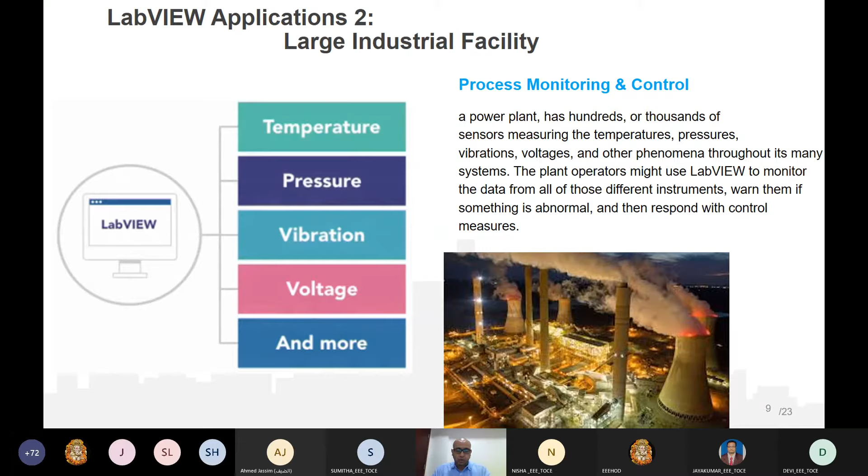Same thing can be done for the industry. Voltage, current, whatever, just name it. In CompactRIO, whatever you have, you will find the right card to connect it directly to the CompactRIO and start working with it.

Now, the third part is for students and research in university. This is the part I like, the part I spent the past 10 years working with, where I find it's very easy for a student to go with it, and more professional. Arduino or Raspberry Pi are fantastic, but they work for some kinds of projects. They have so many limitations.

For example, you have analog input in CompactRIO. In Arduino, you have analog input, but you cannot make analysis on it. It is 0 to 5 volts. If the voltage reaches a point, then you can do whatever you want. If you want to write a program to make analysis, you will consume the Arduino's resources, and it is very limited in sampling time and so many things.

But when you want to control robotics, where every microsecond counts, then of course you have to go with more professional and more accurate software and hardware. And here comes National Instruments equipment.

For example, in some of the drive system projects I did, a millisecond is huge. I have to go to less than 1 millisecond in a drive system, where you have a very delicate process. Then of course I can go with National Instruments, and you will get microseconds, even less.

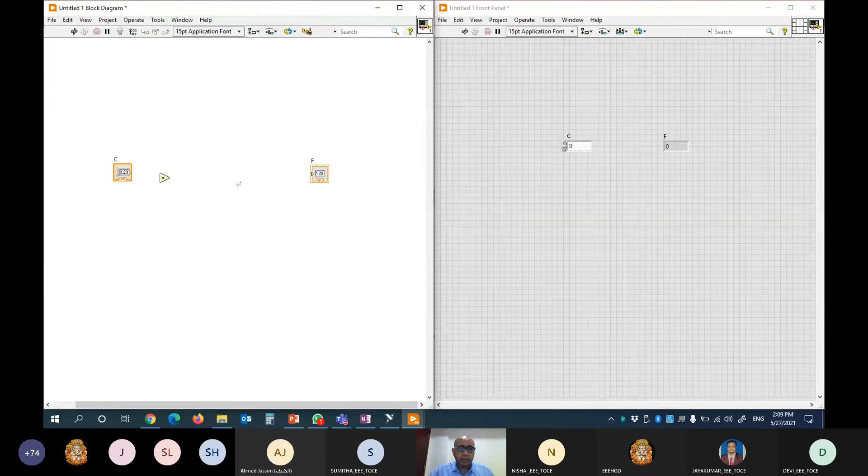Okay, so multiplication and addition. First of all, I'll go to the math. As you can see, it is very easy. Multiplication, and then I go to numeric. There will be addition here, and here I have to create a constant, and here I will create a constant.

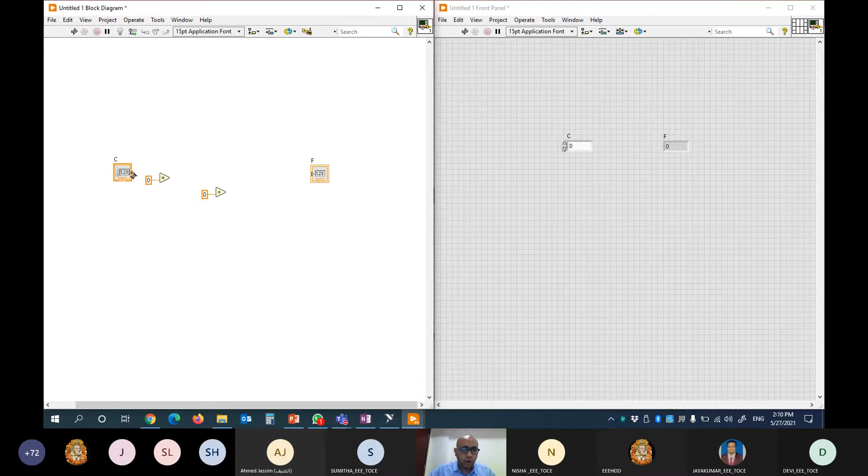Now the Celsius, for example, which I put here, could be a data acquisition, like I can get this signal from a data acquisition. It's going to be a voltage, then I will manipulate the voltage, then it represents the Celsius. So whatever the source of the Celsius you got, it will be connected here, and this one will be connected here, and this one will be connected here. As simple as this. This is what I've done in order to convert the Celsius into Fahrenheit.

I need to change these data. Let me go here, 1.8 and 32. So this one will be 1.8, and here will be 32. It's as simple as this. If I run it, 0 Celsius is 32, right? So if I change the Celsius into, for example, 100, what is 100 Celsius in Fahrenheit? It will be 212. And so on. So basically, this is how easy it is to program in LabVIEW.

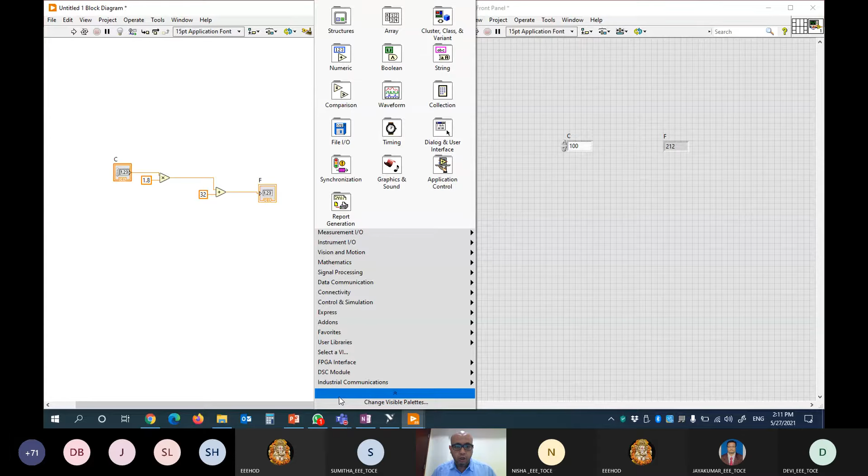If I want to go through LabVIEW very quickly, you can see here the version I have is an academic license, so I have most of the toolkits I can find in LabVIEW. For example, in our college we usually go with the Express, or measurement input output, or instrument input output. Sometimes we go with the Express for the input, and the input is going to be data acquisition. I can put the data acquisition here, and you will see how easy it is.

Now it is open. I want to acquire data, and I can go with analog input, counter, digital, TEDS. I will go with the analog input. Is it voltage, temperature? I have all the types. I will go with the voltage, because let's assume it is connected to a data acquisition and it's going to measure only the voltage. So we have a thermocouple or whatever, then I have a signal, and I want to connect the signal to the data acquisition.

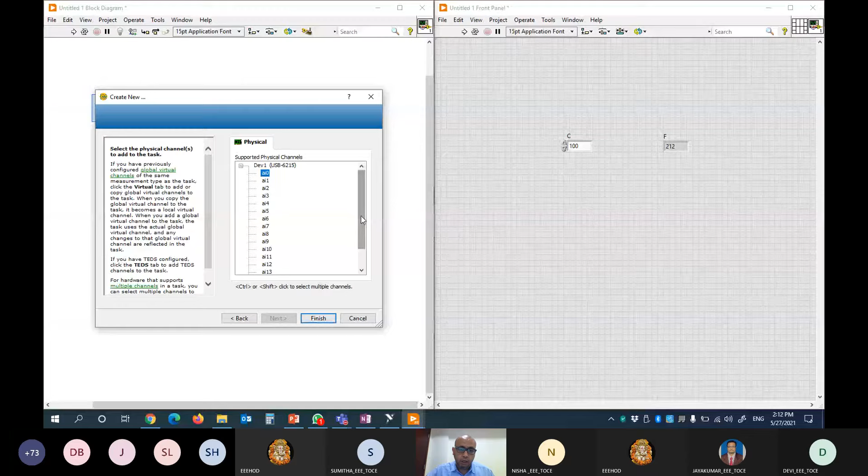I will start with analog input 0. As you can see, the data acquisition I have is the USB 6215, and it can work with 16 analog inputs. So I can say finish. Here I can make a test on my data acquisition. Here I can choose the terminal configuration: is it differential, referenced single-ended, or non-referenced single-ended? You can choose whatever you want.

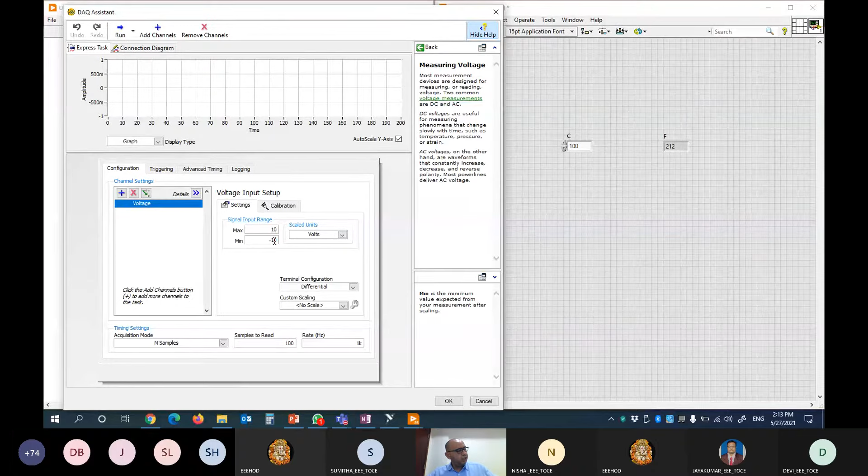I can choose the rate of acquiring data. Here we are talking about 1 kilohertz, a sample rate of 1 kilo samples. This isolated data acquisition can work from 10 to -10. No, wait, this one, the USB 6215, I think can go up to 60 volts, if I'm not mistaken. Anyway, I can decide the maximum and minimum voltage, for example 0 volts. If I press OK, the data acquisition is configured and ready.

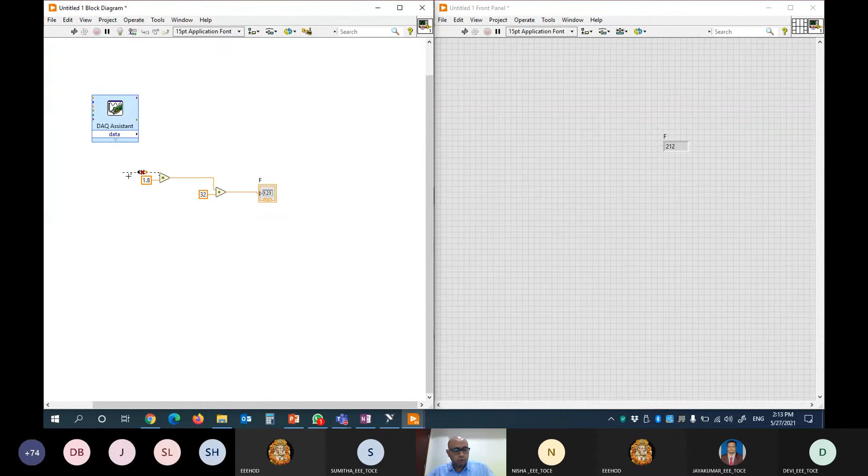All you need to do is connect your transmitter, which generates a voltage, to analog input 0. I can delete this one, Control B, and the data will go here. So the real acquired data, for example in Celsius, I can now change into Fahrenheit and get my value here. I can do a lot of things, for example comparison, if the signal is greater than, let me Control Z, just a minute. Now let's assume I will go here because it will be easier.

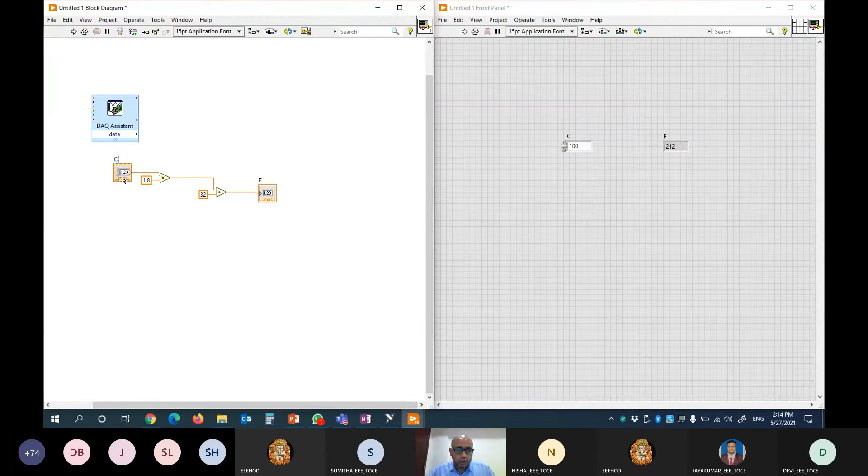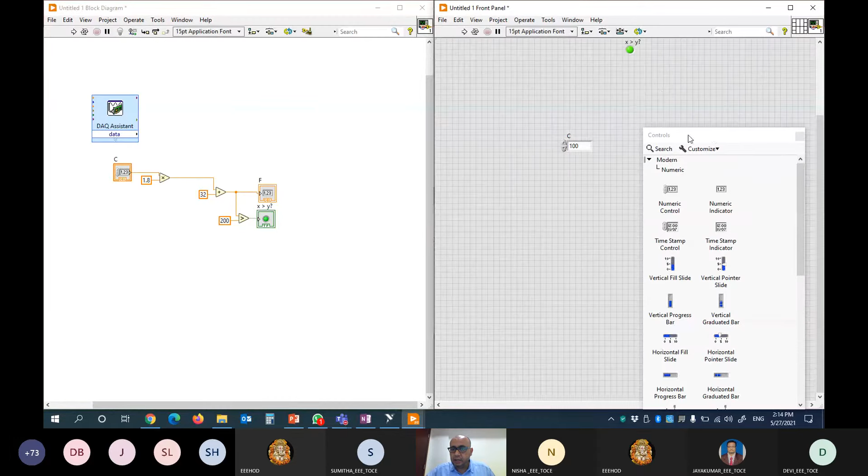I did not connect my data acquisition to any signal, but let's say if I have a comparator checking if the signal, which is in Fahrenheit, is greater than a constant of 200, then I get an alarm. Create an indicator. If I run it, as you can see, the Fahrenheit is 212, so I got a digital signal.

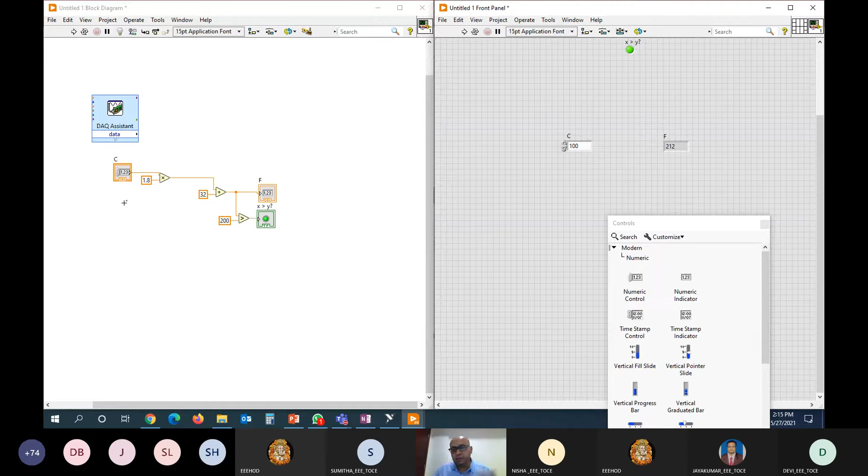This digital signal I can put into another data acquisition, for example, to start an alarm or a cooling system or whatever. So it will be easier for you to use Labview because you focus on the project rather than focusing on acquiring data and generating signals and making sure things are connected. This part is already done by Labview.

I think I took a lot of time. Ralph, are you here? Yes, Mr. Shadi, should you take over now? Whenever you wish. Okay, because I want to give Ralph the time.

I'm actually amazed and speechless with your nice presentation. Thank you, Ralph, thank you very much. I just want to finish these two slides and then I will give you the mic.

Excellent, perfect. So the data acquisition, for example, how it works: it has three steps. First step is the sensor, which is connected to the process. Then the second part is the data acquisition, then the computer, where you have Labview and you want to make your analysis.

So as we said, we have the sensor, then the data acquisition, and then the computer. This is the original one. Data acquisition could be a national instrument data acquisition. By the way, even if you have different data acquisitions from different vendors and you have Labview, it can work with these data acquisitions, it has no problem.

I connected with, if I'm not mistaken, one from Taiwan and one from Denmark, different vendor data acquisitions. But I didn't want to use Python or C, I wanted to focus on my projects with my students. So I used Labview and it was working perfectly fine. I didn't find any problem.

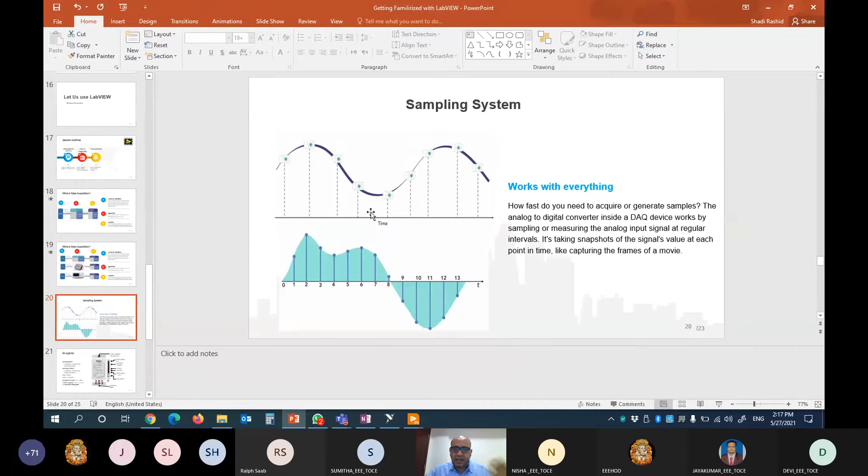ni.com is amazingly important for any student, especially those working with control and electrical engineering. If you go to ni.com, you will find thousands and thousands of documents, and it even works like a tutorial.

For example, it was useful for me personally to understand Modbus, OPC, to understand RSE, non-RSE, and differential. I got a lot of data and made some manuals for my students from National Instrument. So it was useful for me.

The Labview community is amazing, where people talk to each other and you can get data from them and understand the problems they face, and it will save your time while working on other projects.

There are a lot of learning modules. If you have academic classes, like we do in my college, you can go to very interactive, amazing learning modules from National Instrument to understand even more about data acquisition and control.

The good thing with National Instrument and Labview is it has different exams and certifications, and these certifications are internationally recognized. For example, CLD, CLA, and CLED. You can search for these, and you'll understand that if you have, for example, CLD, then you have this knowledge of programming.

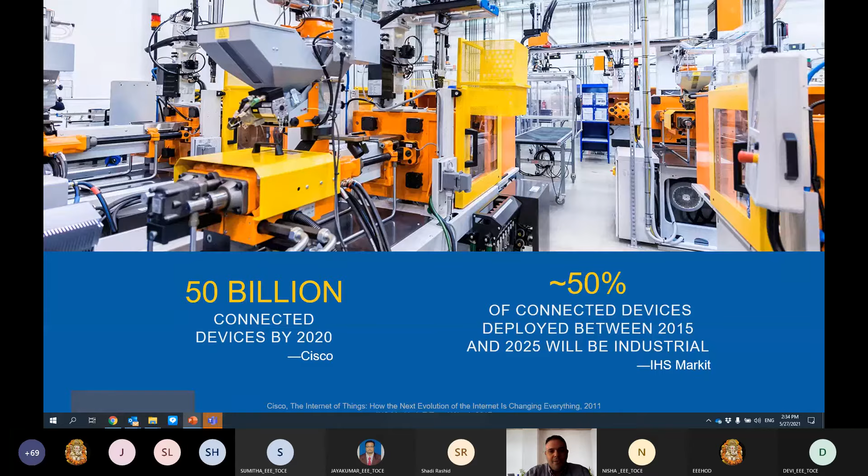Now I'm going to visualize some of the LabVIEW features to complement what my colleague Mr. Shadi already elaborated. Once you have LabVIEW installed, there's a quick answer to the LabVIEW NXG question that was brought up earlier. So NXG is LabVIEW Next Generation, where Mr. Shadi stated earlier it might be the LabVIEW of the future. It's similar to the industry of the future, where we are enriching it with lots of toolkits.

This makes it very affordable and easy for the biomedical engineer, for professors, and for industrial people who are not engineers, like doctors at hospitals. These guys must have at least the technology available for them to be able to service their needs. So let's see some of the software that we can have immediately upon installing LabVIEW.

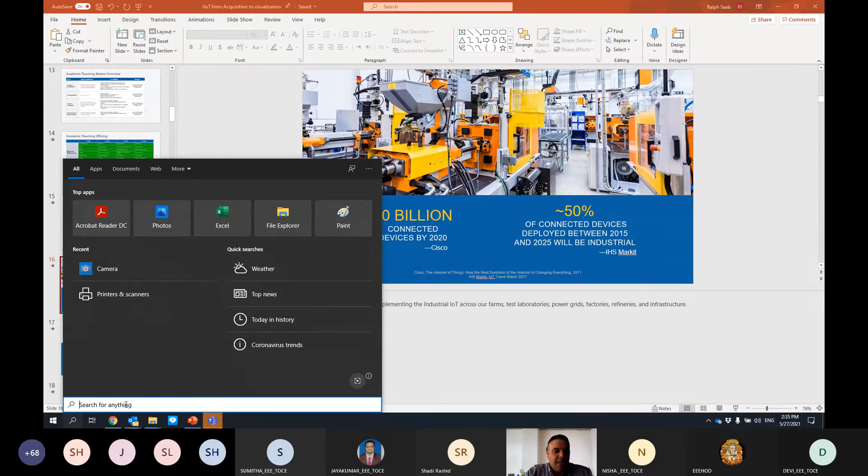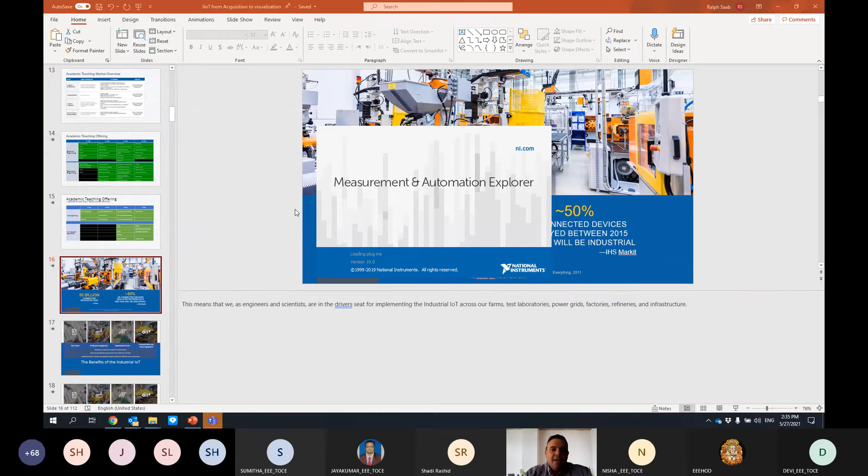It's MAX, the Measurement and Automation Explorer - you can simply launch it. This is where you can start using your data acquisition and start applying algorithms of simulation related to virtual instrumentation even before having the hardware acquired. Let's say you have ordered the hardware, but it's still at customs and hasn't arrived at your facility - you can now create the simulation device to start your code and program from day one.

One of the nice data acquisitions I like to give as an example most of the time in a demo is for temperature measurement. Let's use one of them, the 9211. I'm going to use it to choose all the NI, or most of the NI data acquisition devices, which are available to start using in simulation, even in code programming, before they arrive to your field or laboratory. Let's use, for example, the 9211 and click OK.

Now we have the data acquisition present here. We can name it whatever we want. Also, we can delete other simulated data acquisition devices in order not to confuse our program if we are a beginner in this. Okay, and then we can now run LabVIEW.

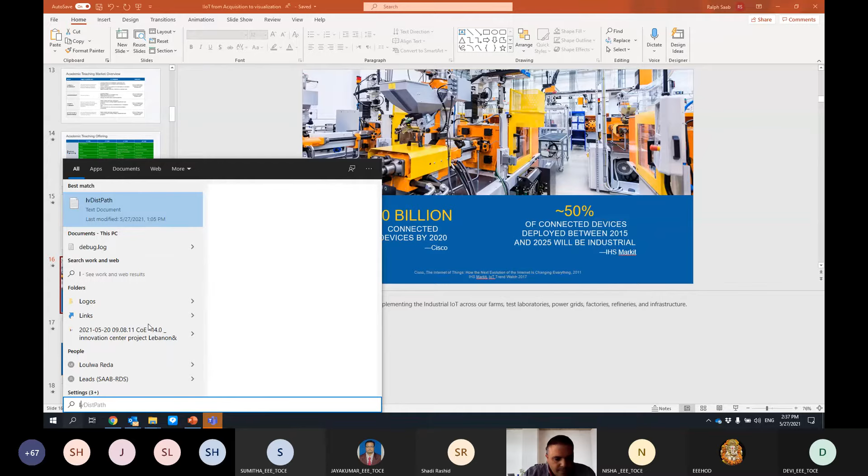We also have in MAX something called a remote system. This is very well used whenever you have a deployed data acquisition in the field, where we can program it remotely to save on time, cost of travel, and limitation due to lockdown. After programming it remotely, we can install the code on it and have it running perfectly. Now I'm going to close this and run LabVIEW - let me minimize this.

Once LabView is launched, I can start building my virtual instrument code as Mr. Shadi was explaining earlier. I'm going to create one HMI to build together the first HMI SCADA system. Once we have LabView launched, we're going to start LabView and have a new VI.

We're going to click on Control T, where we can have the two environments. Here is the block diagram, as explained earlier, where we can draw our code, because LabView is a graphical programming language. And here is your SCADA system where you have to build your HMI.

Let's start with a small simulation. We can simulate, just for the sake of time, one random number between 0 and 1. Then we can multiply it by a certain knob.

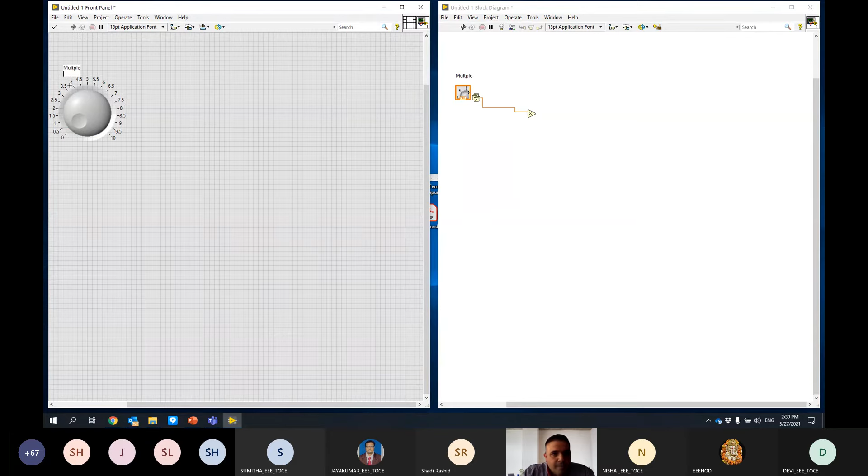Let's create it here. It's kind of a dialer. Multiply. Then immediately it's created here, where we can connect it as a data flow programming.

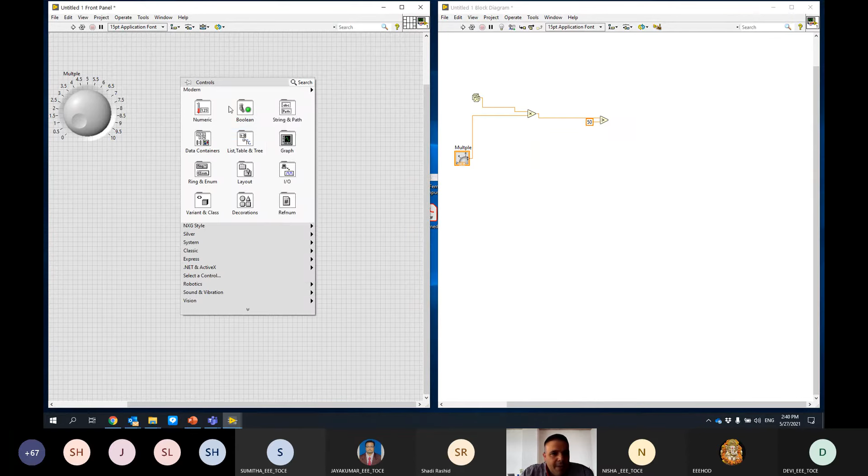Then we can run a certain comparison algorithm. Let me see, comparison: if this result is higher than a certain constant, then we're going to create an alarm. Let's have the constant, for example, here at 50. And then we can have the alarm here to say that it is high.

We can also configure it so whenever it's high it turns hot or red, and whenever it's off it's transparent, in order not to confuse the user. As you can see, the result of this comparison is a Boolean value.

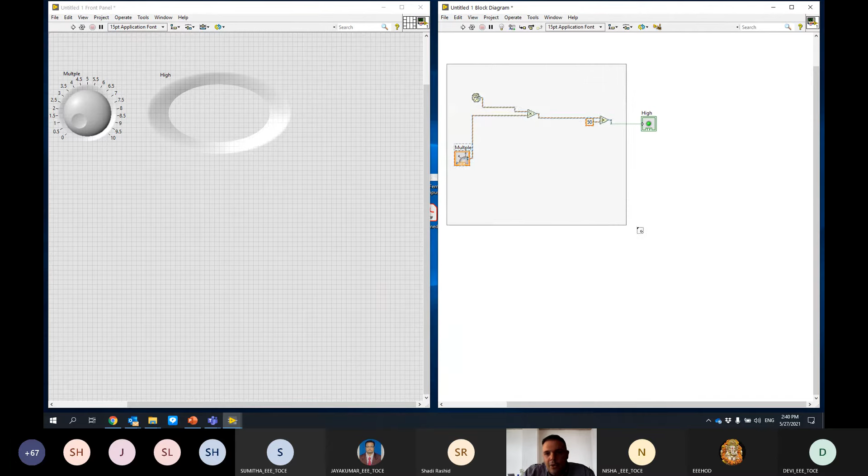Now we can put all the code in a while loop. Let's put it here and loop our code. And in order not to go into an infinite number of iterations, let's click for it a certain loop condition, or we can go here and click create control.

At the same time, we can have a small graph to illustrate the results. Let's put the graph inside, and then we can put some signal merging. We can get it from Express, Signal Manipulation, and get the list of functions of all the signal analysis.

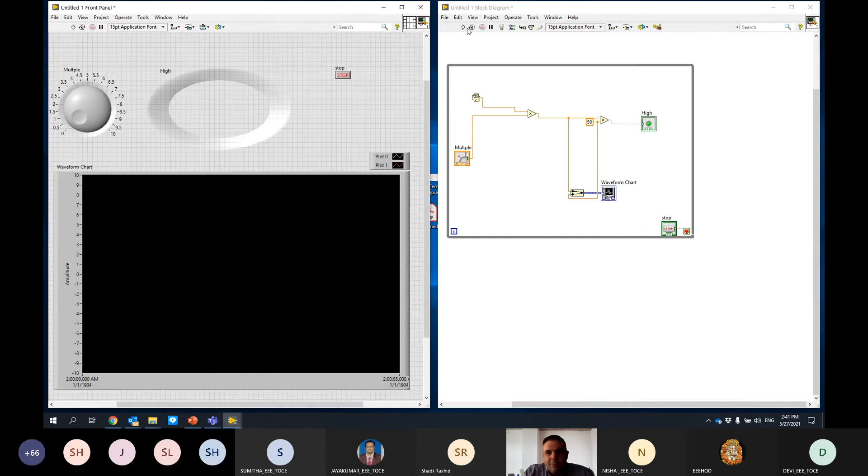Let's take the first signal, which is multiplied by a certain value, and then compare it to the second one, which is the reference, here 50. Now let's put both of them on the same graph, and we can start by clicking run. We can remove the auto scaling from the y-axis and put it up to 100.

As you see now, this is the reference, which is 50. Because this is a random value between 0 and 1 multiplied by 0, the result is always 0 and the alarm is off.

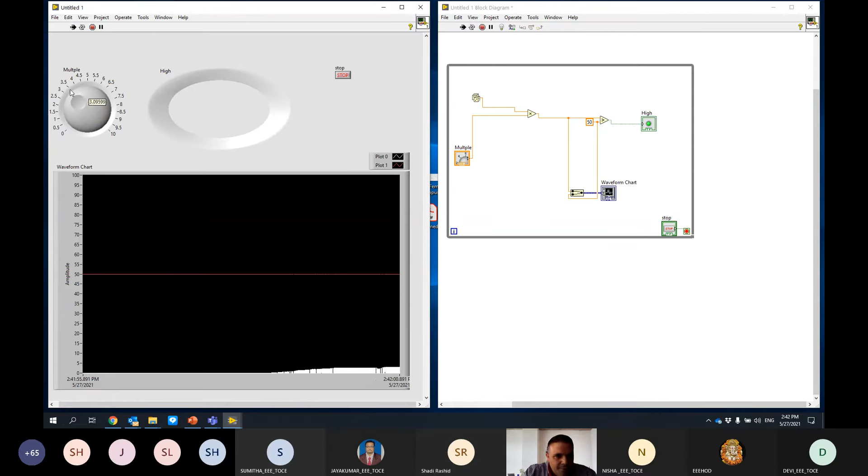As soon as we multiply it by a certain value, the value is going to increase, and we can now increase the knob up to 100, and even above that level. As you see, we are barely reaching 50, but as soon as we exceed it, the alarm will click immediately.

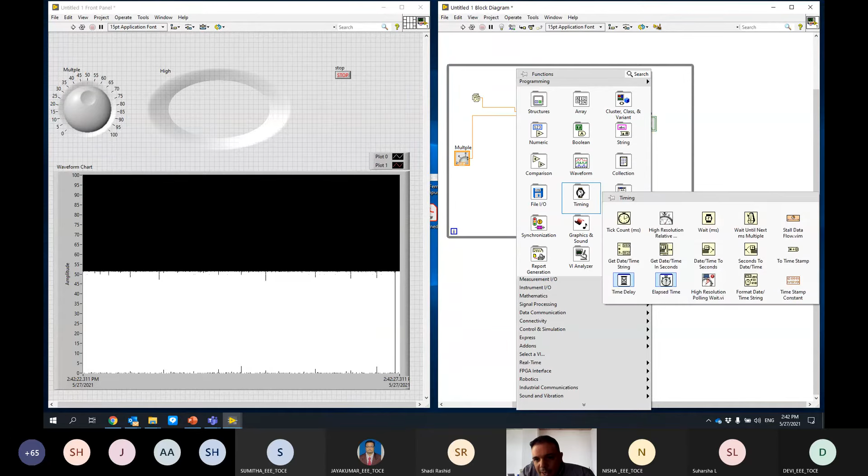In order to make it more visual, let's add some timing. In this timing function we can introduce some delay. We have multiple functions, like wait millisecond and wait until next millisecond multiple, where LabView can go low level to control itself, the machine, the CPU, and the core of each CPU.

I'm going to show you this one later. Let's create a control for it and set a certain value for the delay, so we can delay the loop speed. Right now the loop speed is still at its own maximum speed.

Let's add 100 milliseconds. As soon as it's added, you can start seeing the value. Let's add it to 200 milliseconds - again the code will become slower and slower.

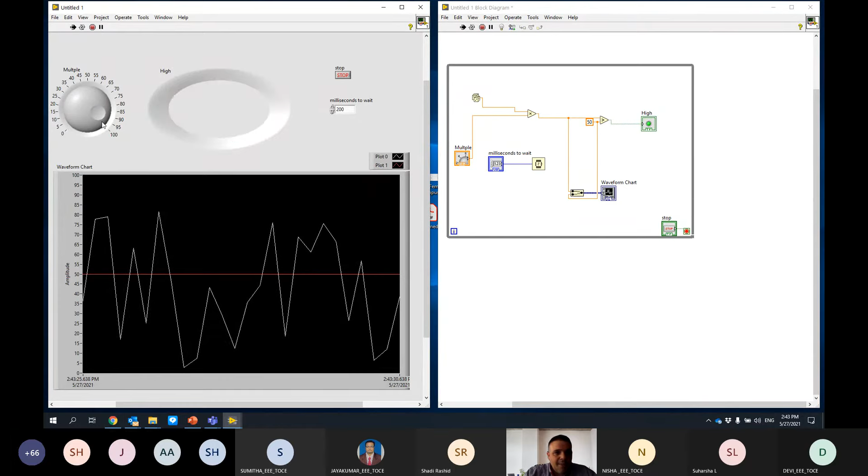And as soon as we increase the multiple value, and as soon as it comes here, you will see it blinking or getting an alarm.

Now, what is very easy is to go live and have our first IoT system - we can use Tools, Web Publishing Tools from LabView. Here, you can go to your block diagram, run web publishing tools, and host your VI to transform your own computer into a server base.

So you will be hosting your own web server from your own computer. Let's request access to it and start our web server.

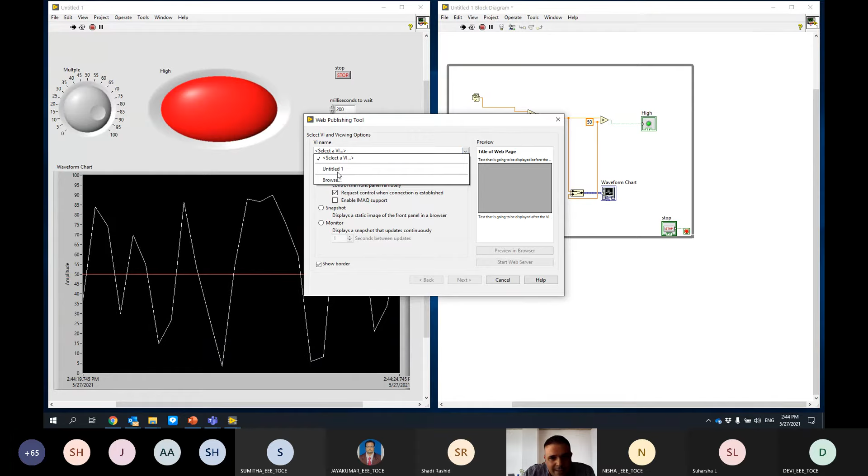And we can start seeing it as soon as it is built. Once it's built, I'm gonna immediately click on preview in browser. Let's as well save it and publish it. You have to use your Internet Explorer because some Google add-on protections or security might not allow you to publish it.

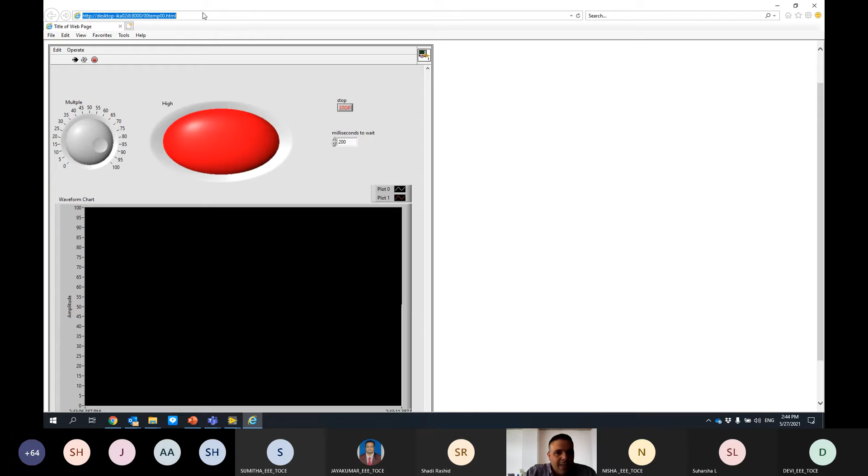Now you can have it. Anyone who is on our virtual private network, our VPN, can click on the Internet Explorer, request access, change the values. Everything is online. I don't know if you are able to see it, and access your code. Okay. So I'm gonna stop it right now, go back to the code and click stop.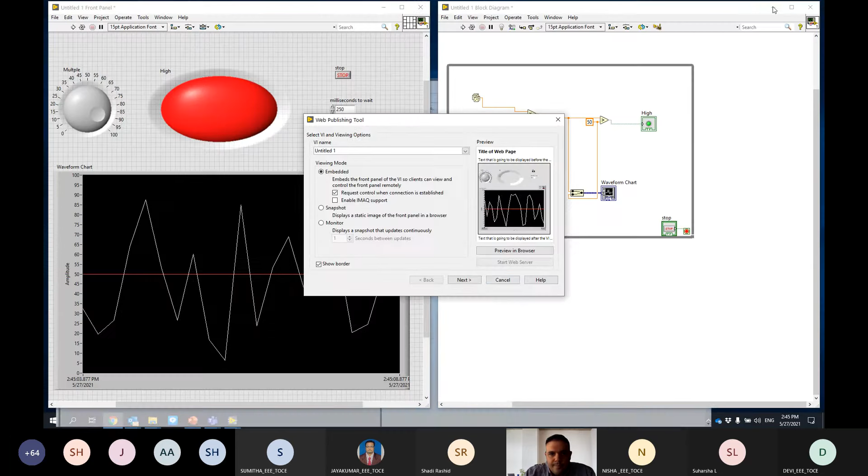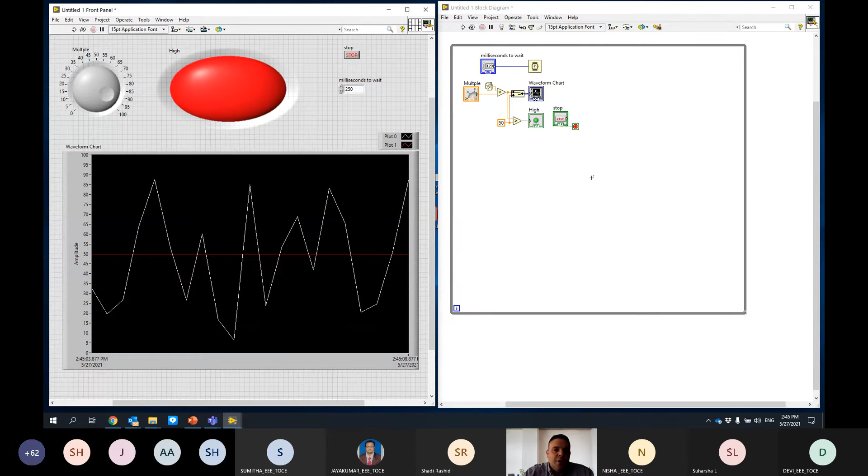Something that we can now do as well is clean our code, Control U, and here as well, the code is clean. It was brought up in the earlier discussion that we can use several softwares for the programmers, because as Mr. Shadi mentioned perfectly, LabVIEW is mainly for engineers, but still it accommodates the use of the programmers.

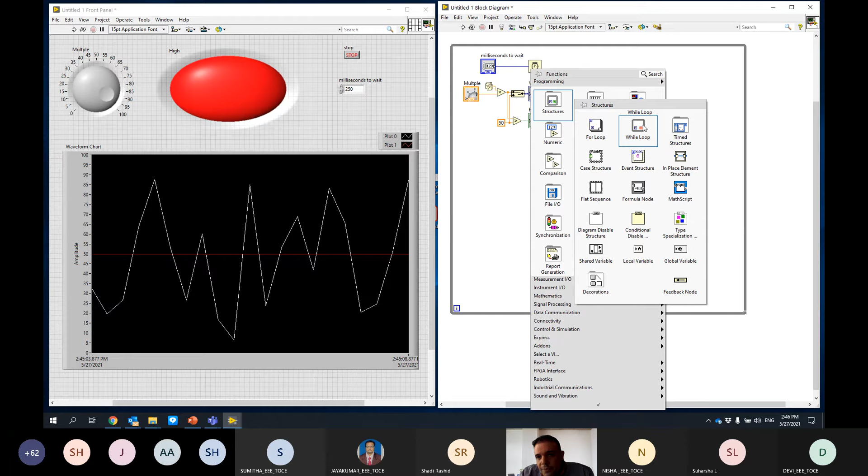We can call LabVIEW to get from it several, let's see, express. We can get some inputs. We can ask for some data acquisition, and also we can use the very useful programming language like C language. Here we can import any code from C. This is an example from C language. Also, we can import some code that we have already built from MATLAB. This is one code from the MathScript library.

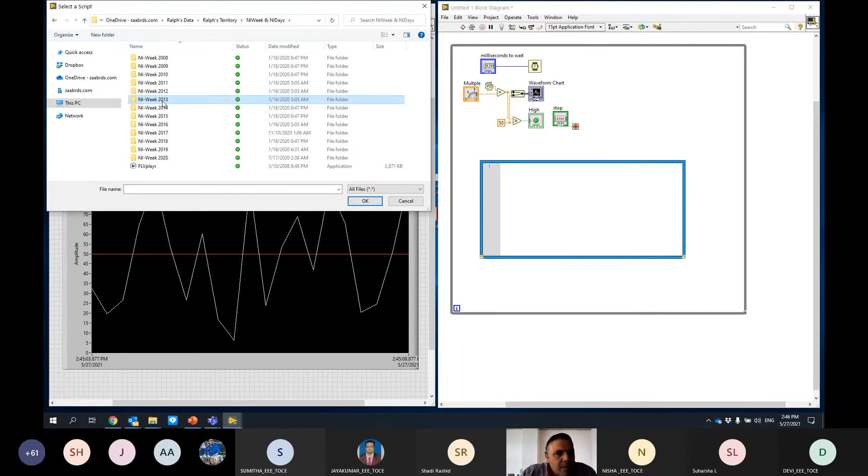I have a code that I built in MATLAB 20 years ago, actually, and I will be adding it today. Let me add the code, importing it from one of the folders where I saved it already. And this is a simple code that is doing FFT, the fast Fourier transform. Okay, so now LabVIEW, let's see it. I don't know if you are able to see it or the screen is a little bit small.

As you can see, there are some errors in line 1, line 2, 4 and 6. And this is very simple, because my signal input is not declared. So let's declare this variable, add input, my signal. Once my signal is created, automatically LabVIEW notifies me that the MATLAB code is correct, and I can simply now connect it to the result of my code and do FFT to my generated signal and display

and transfer my data acquisition from a time-based oscilloscope into a spectrum analyzer without needing to buy either an oscilloscope or a spectrum analyzer, by simply having the data acquisition, the data analysis, the data which was measured, to display its time domain and display its spectrum analysis. And here I can simply right click, add an output, FFT result.

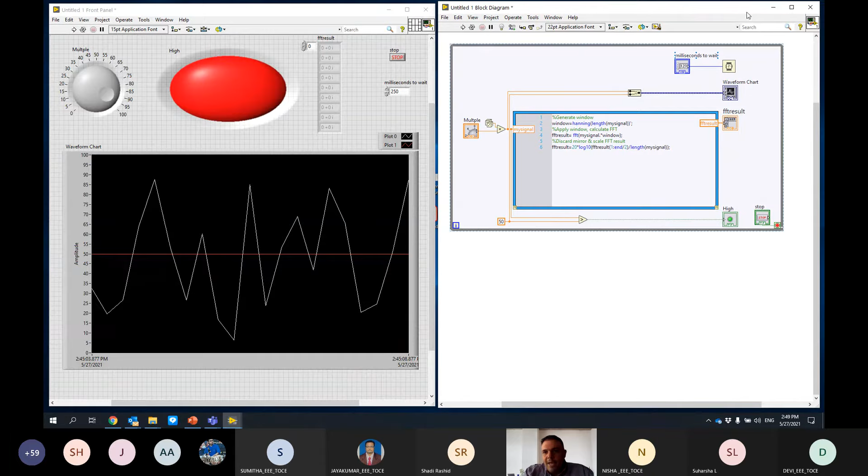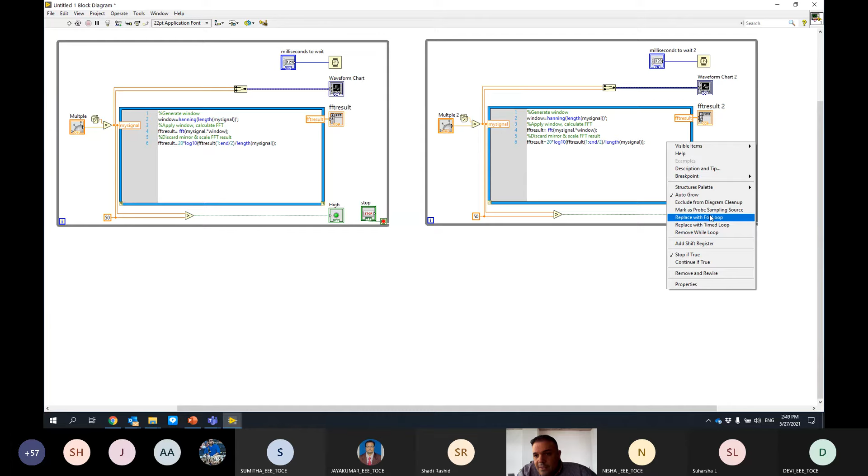In addition to this, what we can do in LabVIEW, let's make something more challenging. I can duplicate the code to have several inputs, multiple input, multiple output, copy, paste. I will have now two loops. Let's say the first loop and the second loop. And in LabVIEW, I can control the execution of each of the loops in a very parallel way. How? I can simply change this while loop into a timed loop.

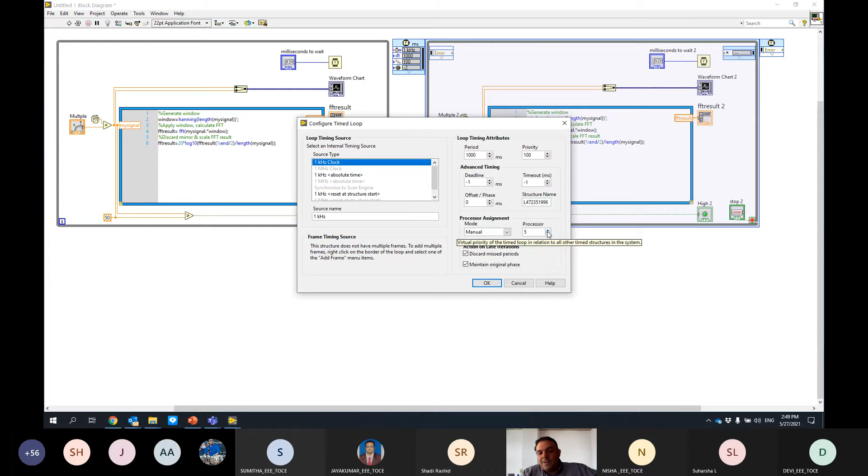And I can control it by the loop scan, by the loop speed, the loop priority, okay, like the interrupt request, how we used to do it on the DX4 and Pentium 1. Also, we can control manually on which core each loop is gonna be executing. So it might be on core 0, core 1, core 2, core 3, up to core 7, because this is i7. And so on, okay?